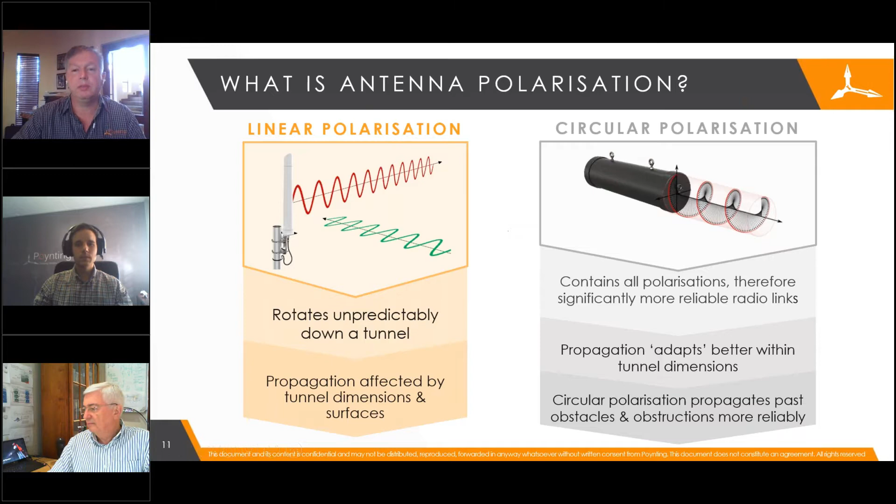And then also quite interesting, and I'll show that in a case study shortly, is that circular polarization tends to propagate past obstacles and obstructions. So I'll just quickly touch on that in the case studies where that has become quite evident and what the results of that are.

So just another slide on vertical and horizontal polarization. As you can see over here with the vertical polarization, you've all probably learned in science in high school that when you have a wave, also in a water situation, you drop two stones, you'll see that there's constructive and destructive waves. And as soon as a wave like this bounces off the top and the bottom surfaces of the tunnel, after the first reflection, you'll start receiving either a constructive or destructive wave.

What unfortunately happens is you could have an amplification of your signal, but you could also have a deterioration in your signal. What actually happens is an effect which is called fading. So the signal fades and becomes unpredictable. So you can either have a very strong signal or a very poor signal.

And most of you have probably, especially in the older days when normal FM and AM broadcasts on your car radio were a little bit more sparse, seen when you approach a traffic light that when you stop, all of a sudden your signal goes away. And then you just move forward maybe 1 meter, 2 meters, and suddenly your signal pops back again. And that is because of this phenomenon. And this is quite common in all different types of communication, but it becomes quite prevalent in tunnels, mining tunnels, automotive tunnels, and so on.

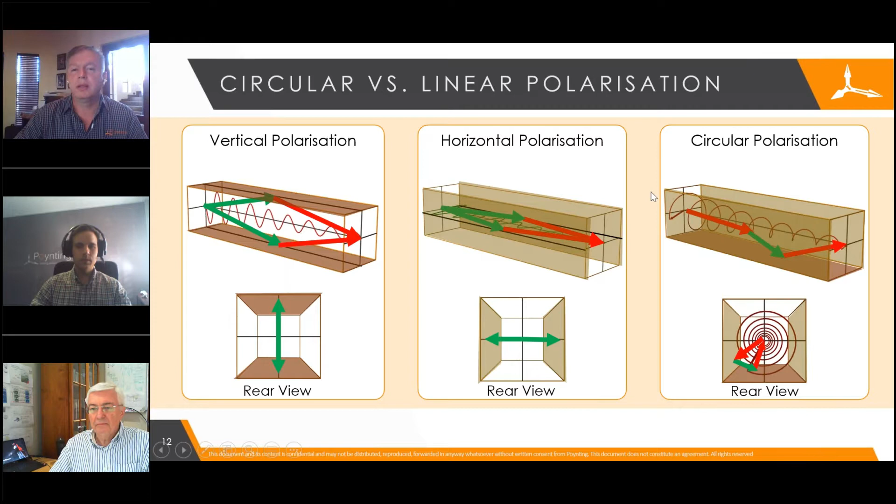So because you're transmitting a circle, imagine these, I don't know what you call these springs that you send down the steps, but if the spring went down the first step in one way, it goes down and it changes and gets a mirror effect. And that causes the signals not to fade that much as with linear polarization.

Next slide is just to show you that within circular polarization, you have both left and right polarization. So many circular polarized antennas are either the left or the right. So it's just something interesting to take care of when you select your antennas. But we'll get to that point also shortly.

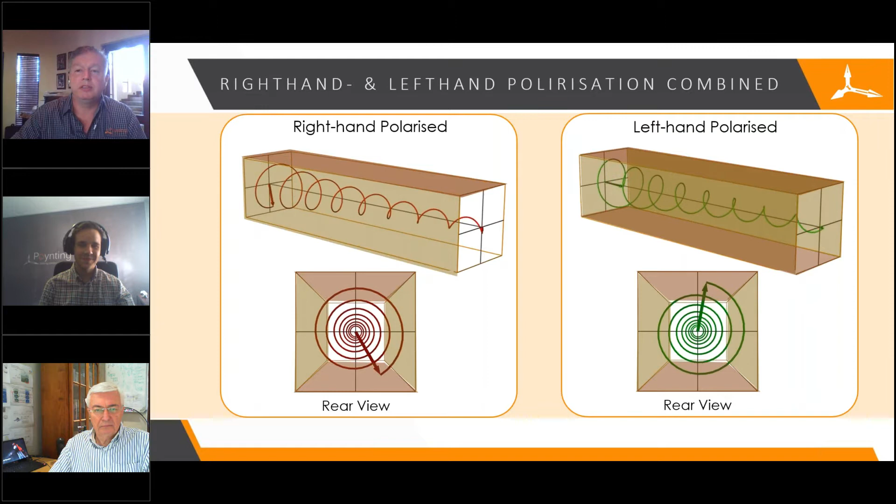You'll also see here that the way that the signal reflects off the different surfaces just becomes much more manageable. But the polarization does change every time it reflects off the floor. Characteristics over here, Ernst is just going to give us a little bit of an overview. A study that was done actually in the 1970s, and it is a reference case still today and still valid today, which is quite interesting.

Ernst? Yes, thank you, Stephen. So this is just to explain the characteristics of underground communication. And as you can see, the propagation of electromagnetic waves down tunnels has been studied for quite some time. And this IEEE article was published in June of 1978, and the title was Radio Communications in Tunnels.

Now, this study was done in Japan in a train tunnel, but the theory and the results still applied to mining and underground tunnels. Now, as you can see on the right, you have your graph, and this is an attenuation graph. So on your y-axis, you have your attenuation constant in dB per kilometer on a logarithmic scale, and then on the x-axis at the bottom, you have your frequency, which is also on a logarithmic scale.

So the study found that the lower your frequency, the more attenuation your propagating wave will experience. So for instance, for LoRa at approximately 900 megahertz, you'll experience 2 dBs per kilometer. But let's say you move all the way to 2.4 gigahertz, you get an attenuation of approximately 0.4 dBs per kilometer, which is significantly reduced. And if you move up all the way to 5.8 gigahertz in the Wi-Fi band, it's 0.1.

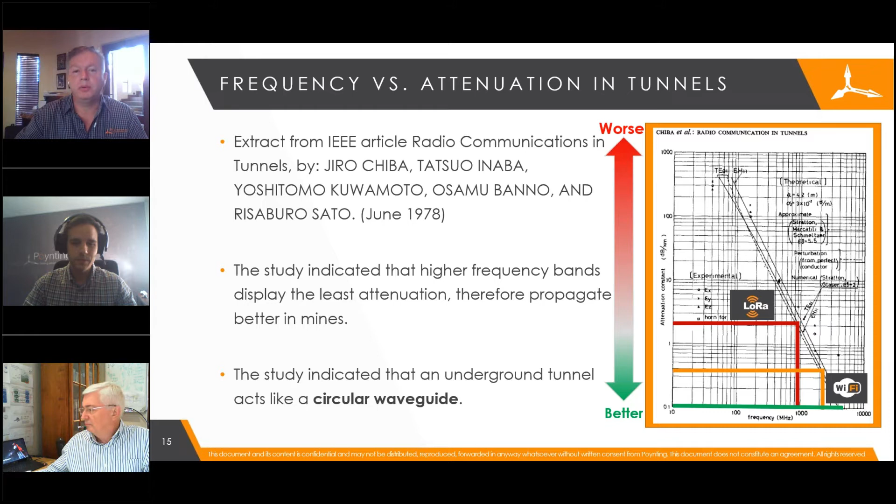Just something to mention there, Ernst, is that this was done in a tunnel with very smooth edges. And I think that leads us to the next slide, which gives us a little bit more information on that. Yeah, just to illustrate the theory of the article, we just have this representation of a tunnel. Now, as you can see, this is just an illustration from 900 megs all the way

to 7.2 gigahertz. Now, at 900 megs at LoRa, you can see the tunnel is quite rough, and the propagating signal would be attenuated due to the roughness of the walls, as it would also reflect quite rigorously from the underground walls. But if you move all the way to 5 gigahertz, you can see that the roughness of the walls significantly decreases and it's much smoother.

That is why, as it's smoother, the propagation of the waves will be much better and can travel much further, which is contrary to normal wave propagation outside. So in other words, we found that 5 gigahertz is a little bit more suited to smoother tunnel walls, whereas the lower frequencies are a little bit more suited to rougher tunnel walls.

And that's just because of the wavelength of the signal that is affected by the roughness or the smoothness. And the smoothness, as we said, acts more like a waveguide for a specific frequency band. And the roughness works a little bit better for lower frequency bands. So this is quite interesting when one selects your frequency band for the specific tunnel that you are using.

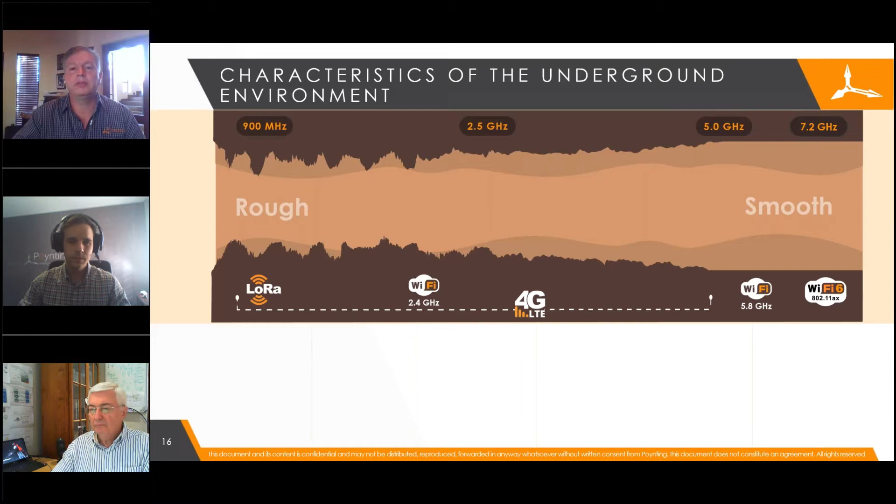However, we have actually seen quite different results, and we'll get to our case study soon just to show you what effects the different frequencies have on the different types of tunnels. That is correct. Thank you, Stephen.

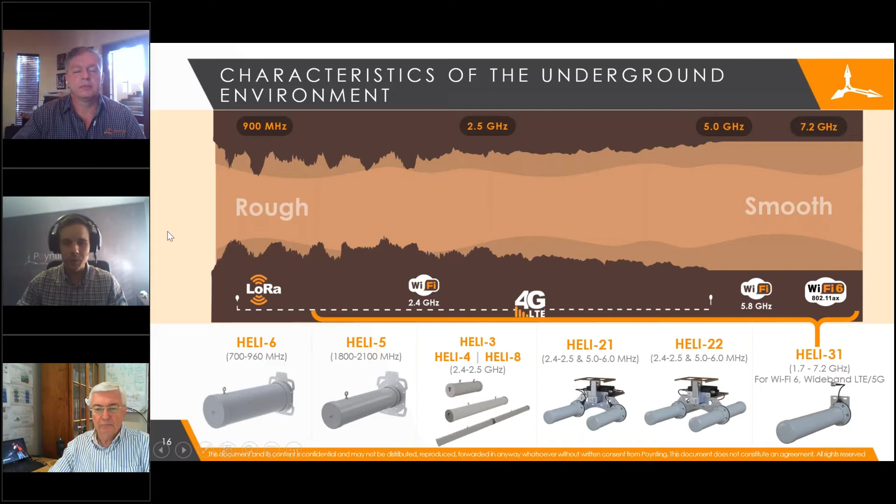Good. Thank you, Ernst. I'm not sure if I skipped a slide there.

No. So just a few implementation scenarios just to show you. We've used a generic router over here. This is our Heli-22, which we will get to in the overview of the antennas later, but just to show you how circular polarized antennas work, at least how to configure them. So the specific Heli-22 is quite a unique antenna. I haven't seen anything else in the market like this. We do have some competitors on some of our other ranges, but we haven't seen something that is dual band per antenna or multi-band.

Ernst mentioned that we have an antenna that goes from 1.7 gigs all the way to 7.2 gigs for Wi-Fi 6, that is 802.11ax, and also for LTE and 5G. But this specific antenna that we're showing over here, Heli-22, is based on the ISM frequency bands, which are used in Wi-Fi, that is 2.4 and 5 gigahertz. And when I say 5 gigahertz, I actually mean that it goes all the way from 5 to 6 gigahertz. That's just the band.

And just to show over here, because a lot of our customers are not sure how to connect them and how they are configured, the one antenna is set up to be left-hand circular polarized. If you remember the previous slides, I've shown left and right-hand circular polarization, but we'll give a little bit more information on that soon. This is actually an antenna assembly that we sell as the Heli-22, which physically has two bidirectional antennas. Each antenna radiates in both directions.

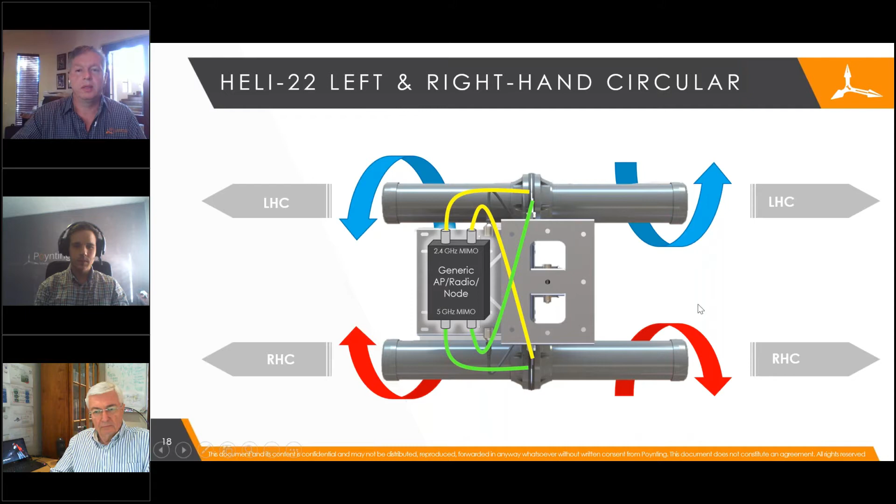Not to go through this one too much, but it's the same with our Heli-21 antenna, which is a directional antenna typically mounted at the beginning or end of the tunnel, or where you have a T-junction, also connected in the same way. Both antennas have both 2.4 and 5, and then you have the left and right hand polarized.

Just to mention quickly, this bracket that we have over here is just one of our brackets. It's a roof mount bracket, and we also have one that is roof bolt for mining, where they have these roof or ceiling bolts that mounts directly to that. It's got a small platform over here for generic routers, so quite a lot of routers, APs, radios, nodes can actually connect directly to this, and it just makes installation easier.

All that this needs is, if this is a mesh node, it just needs power, or if it's being sourced by an Ethernet connector, then it's just power over Ethernet. So that's all you have to take to this antenna, and you don't need all the other power supplies, or routers and APs mounted in a different place with long feeder cables. The shorter feeder cables also help quite a lot to reduce the attenuation, and improve the throughput and signal quality.

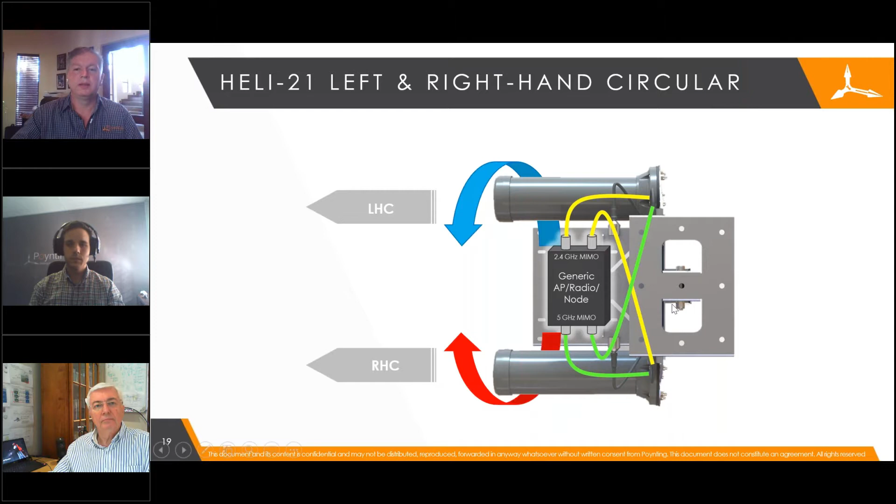Next slide over here, Pieter, you are just going to go over this one. Yes, so this is a case in point where we've seen deployment of access points underground.

Now, with access points, as you can see there, these are vertically polarized antennas. But what we did find was that these needed to be about 100 meters apart, just to get the signal propagation properly along the tunnel.

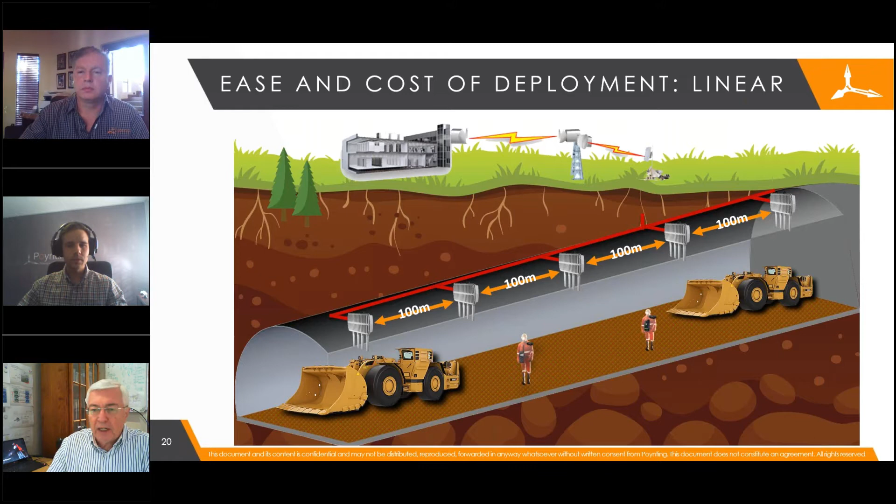So if you can go to the next slide, Stephen. Yeah, so now it's the case study, or the business case. Assuming that we are going to deploy these routers over 5 kilometers, you can see the calculations there, the router or radio, the antenna, and the installation, and that gets you roughly to around $230,000. I must say those are generic numbers, so you can plug in your own numbers to give you an indication of what this cost will be.

Okay, next slide, Stephen. Just to mention something quickly on this also is that we've also seen, okay, so it can be 150 meters. We've also seen 100 meters, 150 meters apart. But it seems like the deployments with these linear antennas are very limited, and it just means so many more access points. So I'll just quickly go to the next slide.

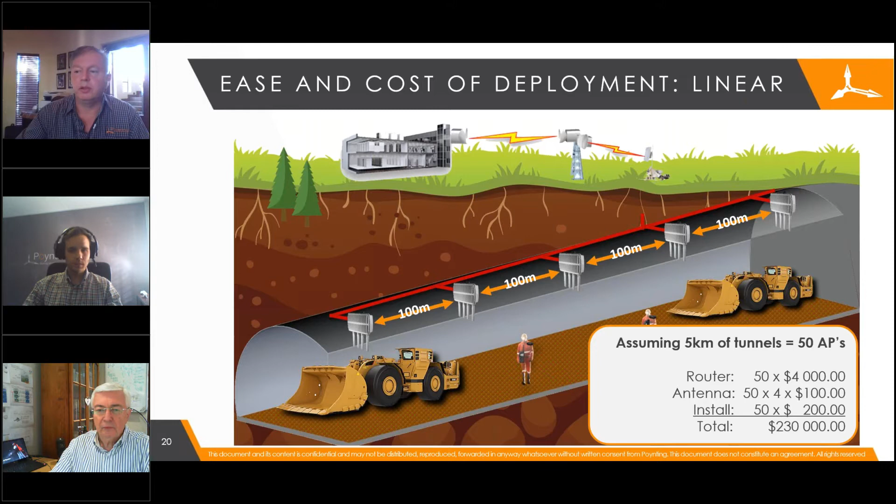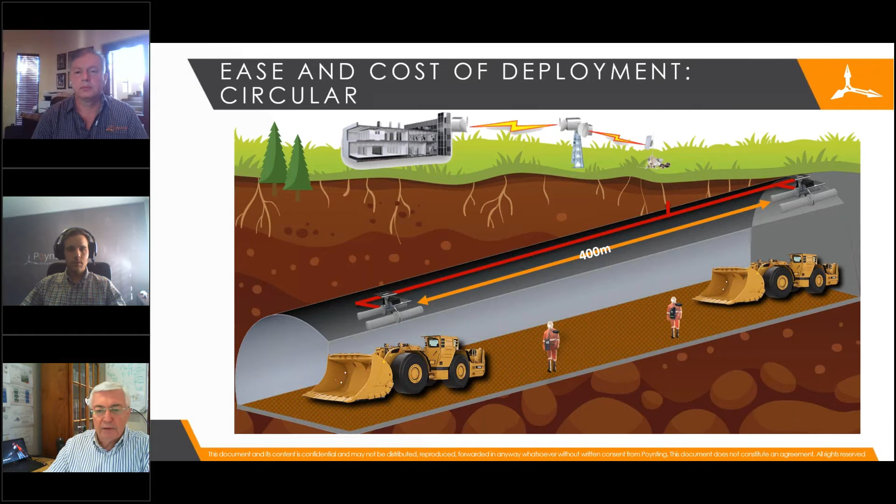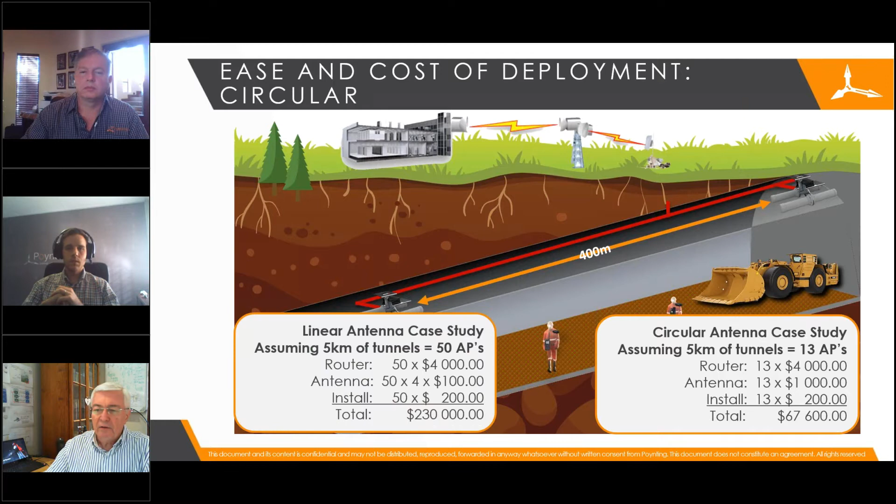So there you can see that to cover 5 kilometers, we will need 13 of these access points, these stations, so to speak, with the antenna costs. So we're looking there at around $67,600 thereabouts. If we compare that to the previous slide, you'll see that that is more than 3 times more to cover the same distance. So obviously with circular, you're getting better bang for your buck.

Just to mention that the 400 meters used here is a specific case that we've had. We've had much farther distances that we have achieved in the coverage. This is just a case study, but we have achieved distances of 500, 600, and beyond. And just to mention that these distances quoted are very specific to the tunnel - you could have wider tunnels, thinner tunnels, rougher or smoother surfaces, depending on what frequency band you are using.

So because customers always ask us what is that distance that we should mount these antennas apart, my first comment to them is that it's good that the integrator actually does some system tests, puts up some test antennas with the radios that you plan to deploy, and check how it performs, because every mine tunnel is different. But the values that we have used in both examples, I would say, is a little bit on the conservative side - but indicative of some kind of an average that we have experienced.

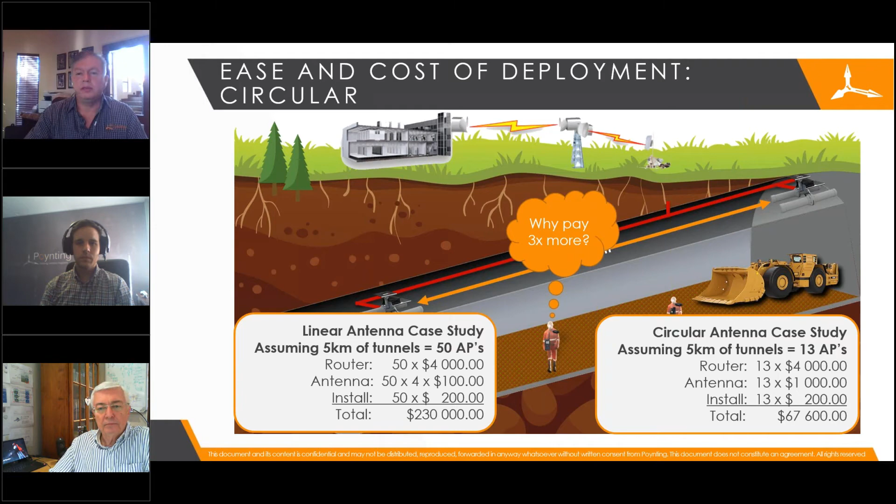Just something to add - we have found that even along doglegs, you would find that the signal propagates pretty well. But as he quite rightly said, it depends also, of course, very much on the type of tunnel, the type of surfaces, and the dimensions, ceiling versus width of the tunnel. In our case studies, you'll get some examples of what our customers have done, and it's quite interesting to just see what the performance is actually.

Okay, Ernst, if you can take this slide. Yes, thank you, Stephen. So this is just to put it into perspective - this is an example, a case study we did for a customer that wanted to deploy our HELI antennas within a train tunnel. Now, the cross-section of the tunnel was around about 5 meters, and we measured the receiver at 800 meters. This was done specifically with our own design simulation software.

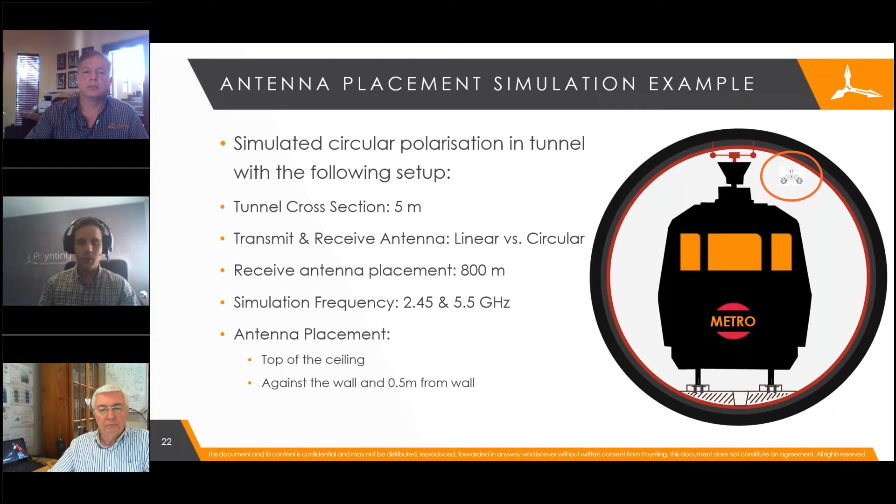We did a few rough calculations at 2.4 and 5.5 gigahertz, and we did two different calculations, measuring the antenna against the wall, exactly against the wall, and 0.5 meters from the wall. This is just to give the customer an idea of where the placement of the antenna should be and how that affects the performance of the antenna.

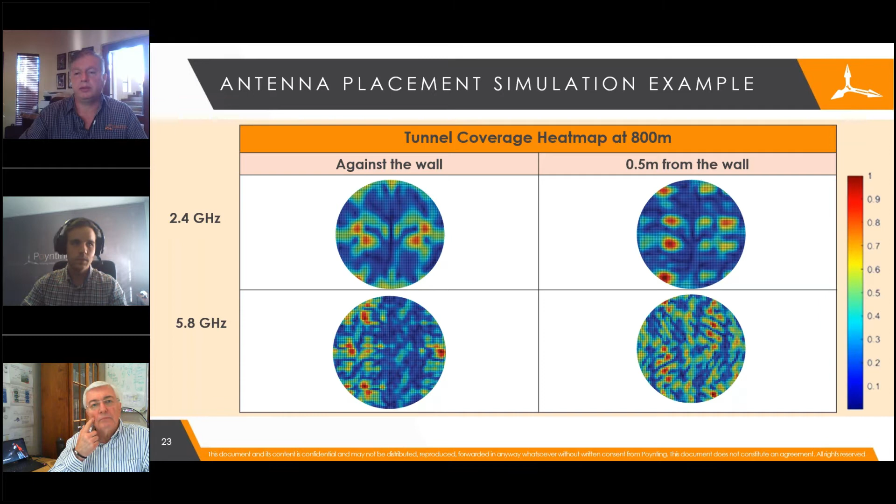So you'll see that the spacing between the antennas was designed to be 3 wavelengths, which we recommend as a minimum distance between antennas to enhance your diversity and MIMO within the tunnel.

And if you look at 5.8 at these distances, we're getting about 6-7 times the wavelength, which provides quite good diversity spacing. So that's just this example over here.

Looking at our recommendation of a minimum of 3 wavelengths, there's no right or wrong answer. If it's more than that, it's also good, and if it's less than that, that's all you have to install the antenna. It will affect your diversity and MIMO, depending on how far or how close you actually mount these antennas, so it's something to take into account when mounting. It's obviously better, as per this example, to space them even farther away.

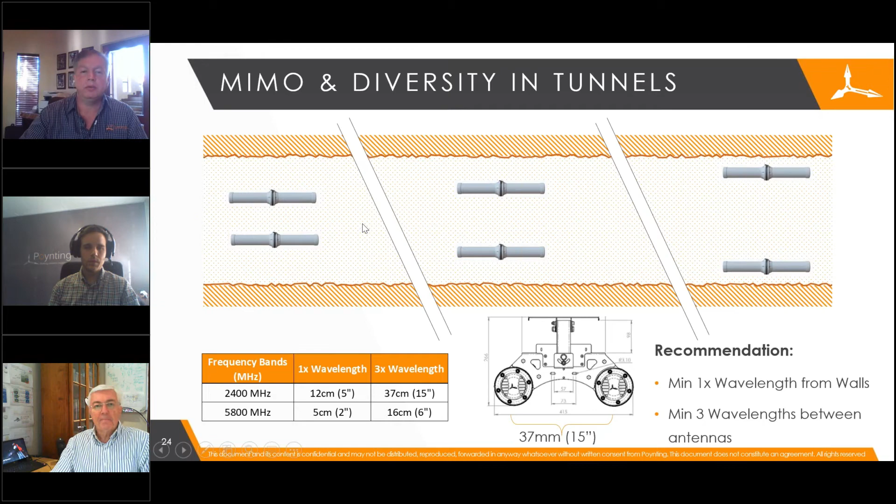It's just a minimum wavelength over here, again a rule of thumb and a recommendation. But with our antennas, if you mount them directly against the wall, you see the bracket is about 120 millimeters, which means you can mount this antenna directly to the wall, as long as the wall and metal parts are not touching this radome, it is perfectly fine. However, 1 wavelength minimum from the wall would be a more ideal situation. So somewhere between this scenario and that scenario is perfectly good for implementation of these antennas.

Good. Historically, when we didn't really have MIMO as a common feature on different radios and routers, you'd have, for example, a circular polarized antenna working from Heli to Heli. There it's quite important, if you have a right-hand circular polarized antenna, to have on the other end also a right-hand circular polarized antenna.

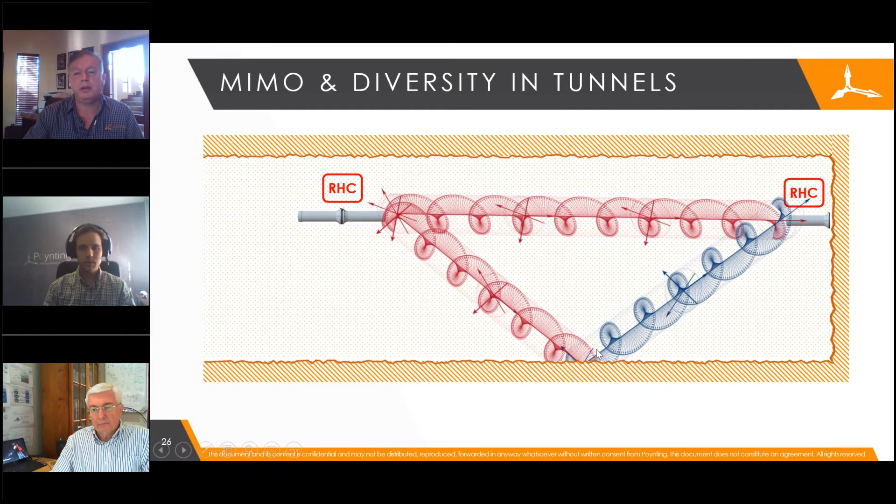However, I'm going to contradict myself now. When you have a reflection off the wall, as I mentioned, if you transmit right hand, that reflection becomes a mirror image, and you start getting left-hand circular polarized. Right hand is clockwise, so your signal rotates clockwise, and left hand rotates anti-clockwise. So although that will also be received by the receive antenna, because it is decorrelated, it will be at a lower receive level.

The same as taking a television antenna, as I mentioned, where the broadcasting corporation is transmitting vertical and you receive horizontal. You will still receive the signal because of reflections and other factors, but it will be at a lower level, and you'd also experience some level of fluctuation, fading, and so on.

In that scenario, later MIMO became available, and as you can see, you can have completely decorrelated signals.

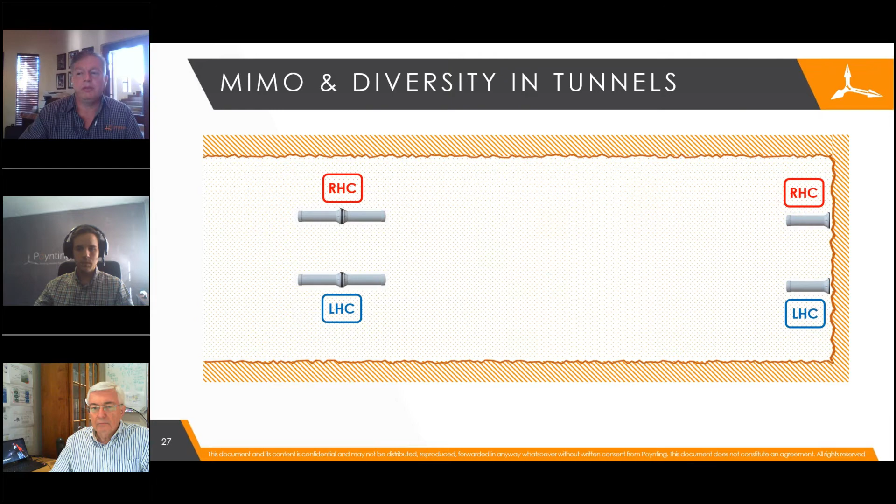But the nice thing about having left-hand and right-hand circular polarized antennas is when this reflects off the wall, you'll see that you will still benefit from the diversity antenna. So maybe your line of sight is to this antenna, or you don't have any line of sight, but its reflections would be completely in polarization with the left-hand circular polarized antenna, as in this example.

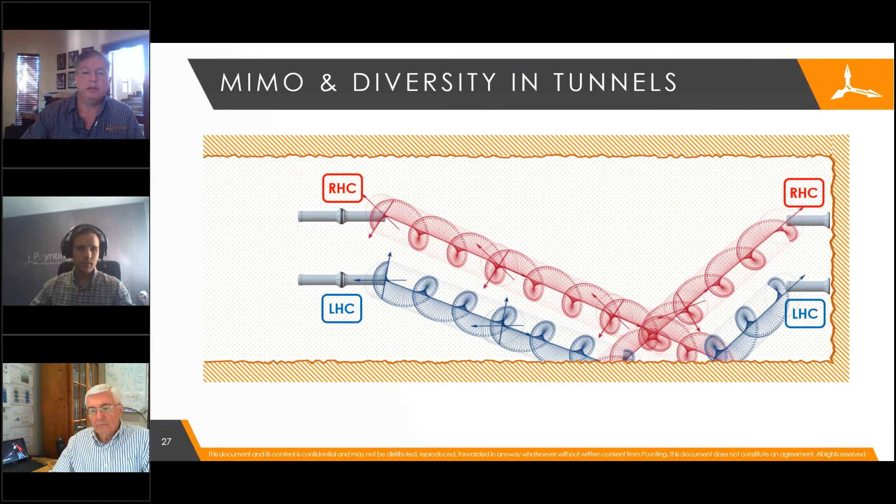So for us, we always recommend having both right and left circular polarized antennas in various tunnels - mine tunnels, automotive tunnels, and so on. Good.

So this is just a quick slide to show you that there are some building blocks when it comes to diversity enhancement. In a tunnel, in any type of industrial application, whether it's industrial IoT or LoRa or whatever the technology, the very first thing one can consider is circular polarization. It actually becomes the building block or foundation of the enhancement of diversity, reducing fading to strengthen your link.

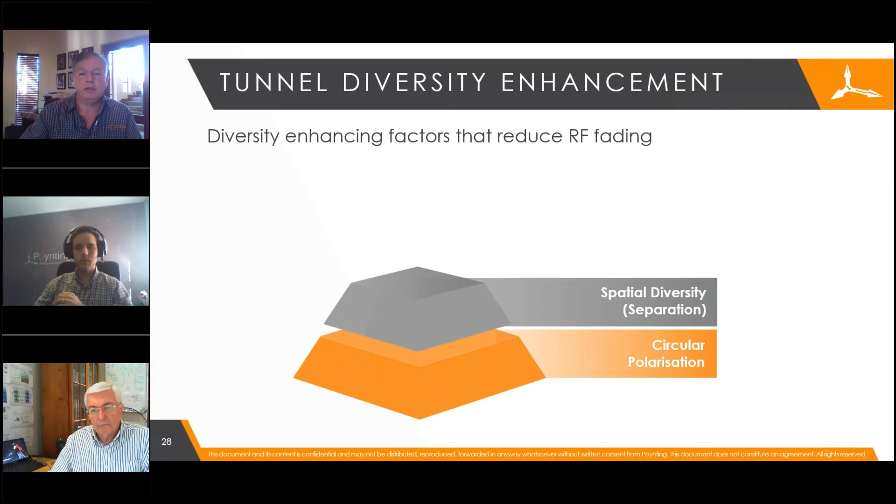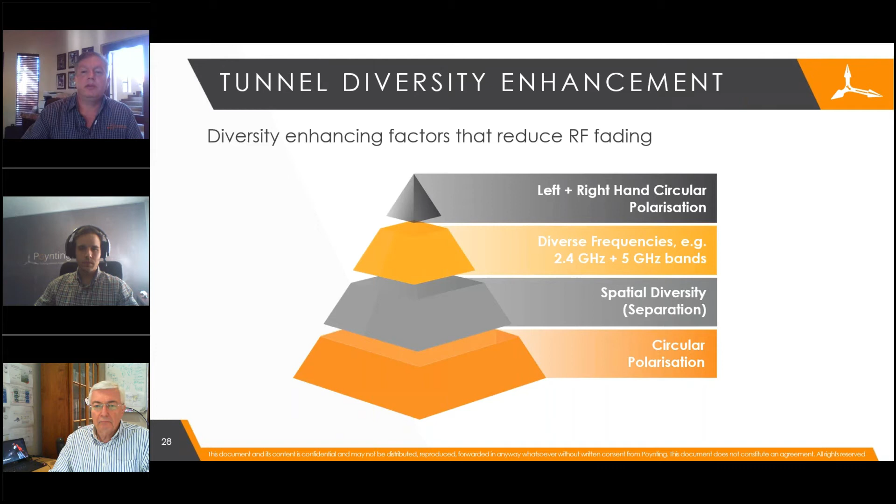The second part is spatial diversity, having two different antennas. Even if it's two right-hand circular polarized antennas, having two different antennas becomes the next step in the building blocks. Having diverse frequencies - I'll show you that shortly - having 2.4 and 5 gigs as an example, or if you use LTE to have 1.7 gigs plus 2.7 or whatever other frequency band together, actually makes quite a lot of sense because they behave differently in different tunnels. And then the apex is to have left and right circular polarization, as I mentioned on the previous slide.

Good, some case studies and examples. This specific example is on our website, on our case studies, if you want to go and refer to that with a little bit more text and so on.

This was a tunnel in South Africa that Peter and I attended personally. We were with a customer and an access point provider, actually a mesh provider, and some tests were performed in the tunnel. You'll see that we performed two tests here. I can't remember if the existing access points deployed were mounted at 100 meters or 150 meters apart, but nevertheless we performed a test in that same tunnel, and I think the customer told us the extent of the access point was about 150 meters, so they had to mount the access points actually 100 meters apart to make sure there's some overlap between the different access points. This access point provider was actually utilizing antenna beam steering technology, which sounded like quite a nice feature.

When we performed our tests, we did our first tests to a tablet and a phone. This specific test was performed with our Heli 22 - actually the predecessor of the Heli 22, which was a prototype antenna. At 155 meters, you can see that the 5 gigahertz signal, we were able to get minus 60 RSSI on the tests. The 2.4 was slightly weaker at minus 65 more or less, and this actually impressed the customer quite a lot.

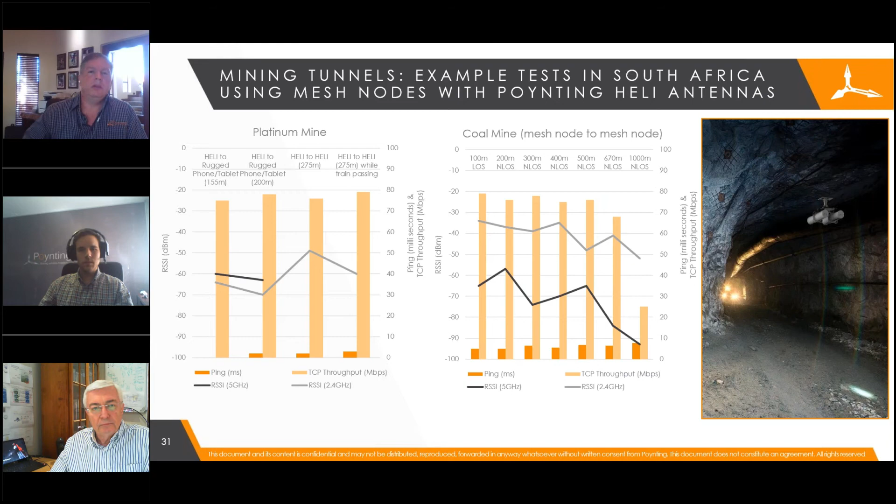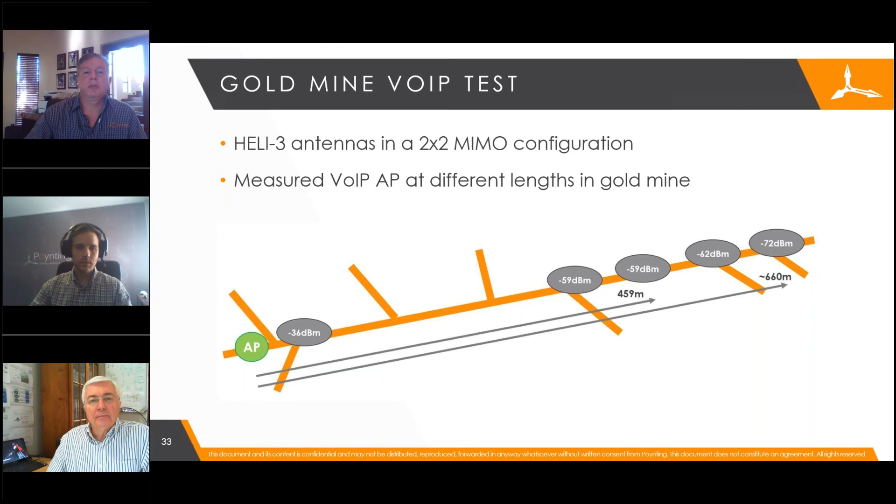So these are the results of the tests. You'll see here at 459 meters, some tests that he did, -59 dBm, and then right up to 660 meters, -72 dBm. So just to give you another example of a case study that's also on our website. This was that same customer using our Heli 3 antenna in a 2x2 MIMO configuration. Over here he was using voice over IP also in a mesh configuration.

Good. So these case studies are just to explain to you that it's not just talk. We actually have the results to show the performance of the antennas.

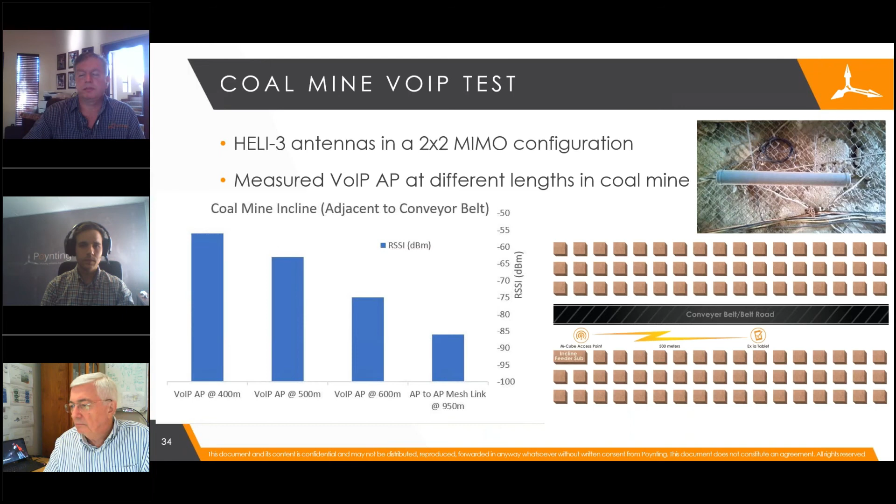Good. Ernst, this is where I hand over to you. Ilona, if you can make Stephen a presenter, that will be nice. Just quickly, just a moment. Okay, thank you, Stephen, and I think you can take a sip of water now. Oh, thank you.

So this is just to wrap everything up. I'm just going to give a quick overview of the wide range of antennas Poynting has to offer for underground communication and mines. So let's begin with our normal Heli series. Now, our CEO, Dr. Andre Fourie, designed the original Heli series 15 years ago, and our original Heli series has been sold for approximately 15 years, and they are still being used in the mines where they were deployed back then. It didn't get a lot of traction back then because the technology wasn't available for the antennas yet. But over the past few years, we've seen a significant increase in sales and interest in our Heli series.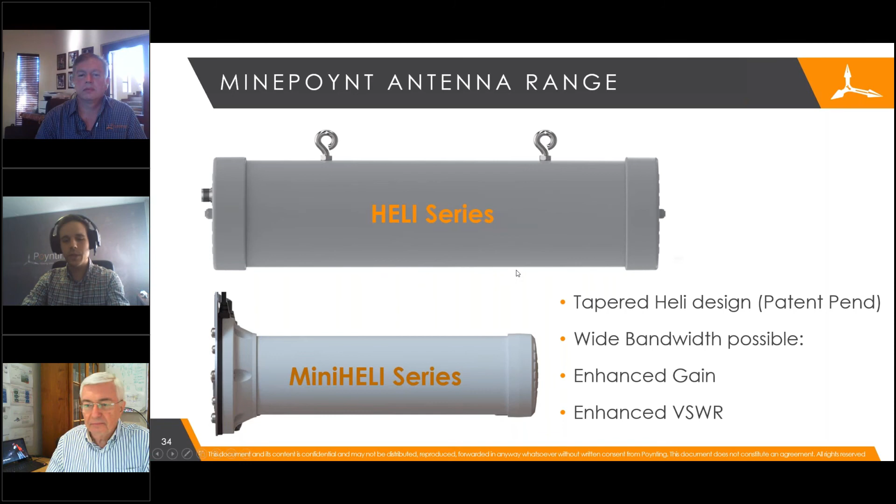And therefore, we revisited the design of our Heli antennas and redesigned it with a new tapered Heli design, which is now patent pending. Now, what's the benefit of this tapered design? This tapered design gives us a wide bandwidth as well as an improved gain. That is why it allows us to cover the entire 5 to 6 gigahertz band. And we also use the same design in our Heli 31, which operates from 1.7 all the way to 7.2 gigahertz. So this has drastically improved our performance with our Heli antennas, and we have seen a significant increase in sales with our mini Heli antenna range in deployments in mines.

If I can just make a comment over there: yes, our normal Heli series is actually still selling very high volumes. As you mentioned, these have been on the market for more than 15 years. And because they are so robust and so dependable, and because people have been using them for all those years, we also haven't really seen any returns on these antennas.

So I'm not sure, if something is going faulty, are they just replacing it? But we haven't seen any returns on these antennas, which is quite interesting as well. So it seems like they are quite robust. And we've also had situations of mines with minor flooding and so on, and the antennas are still working perfectly fine after that.

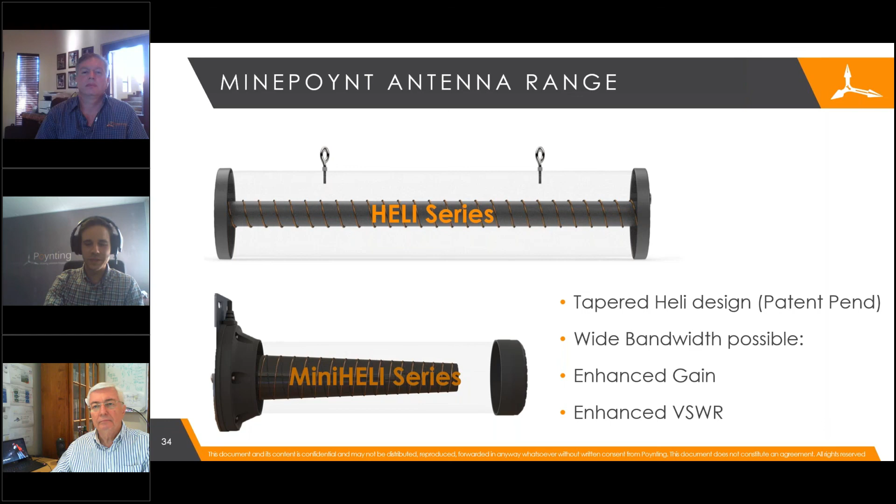No, thank you, Stephen. I appreciate the further explanation. So I just also want to give a quick rundown.

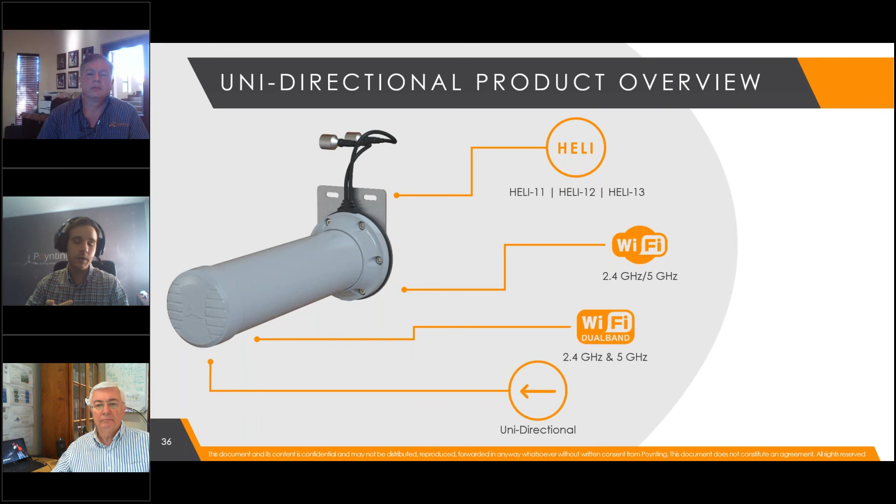This is our unidirectional mini HELI range. This is our HELI-11, 12, and 13, 2.4 and 5 gig dual band, and unidirectional. And then after we have our bidirectional mini HELI range, which is our HELI-17, 18, and 19. And they're also 2.4 and 5 to 6 gig Wi-Fi dual band.

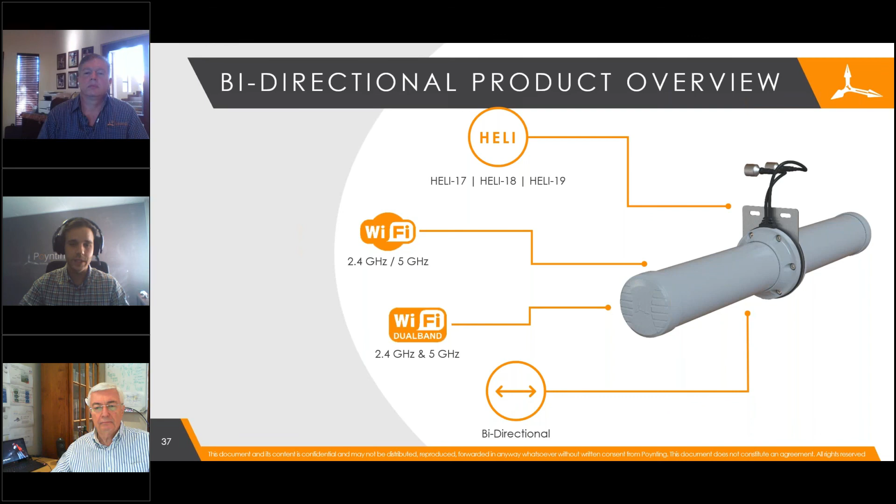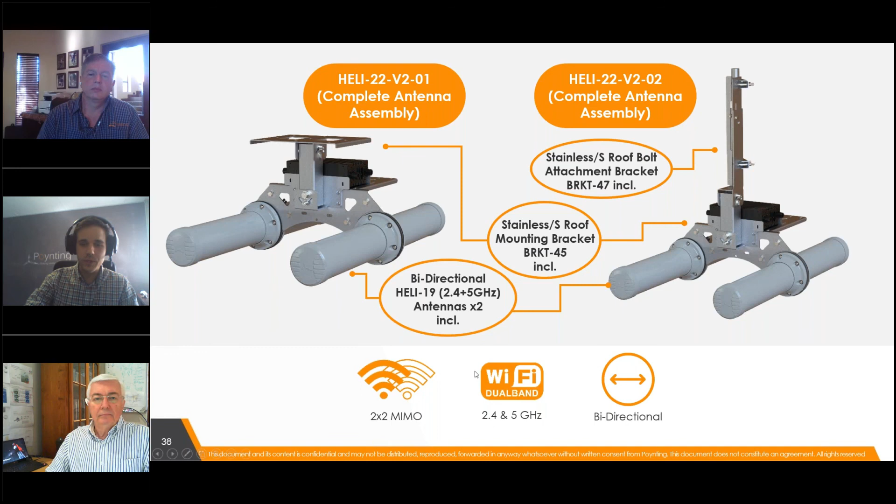And as Stephen mentioned before, here's our HELI-22. You have the normal roof brackets, roof mount, and then you have your roof bolt brackets, which can be used in the mining sector. And they are 2x2 MIMO, 2.4 and 5 gigahertz, and bidirectional.

And then lastly, we just have our flagship HELI-31, as mentioned before. Now this one operates from 1.7 all the way to 7.2 gigahertz as mentioned, and covers all the popular technologies, even Wi-Fi 6 and the 5G bands in the mines.

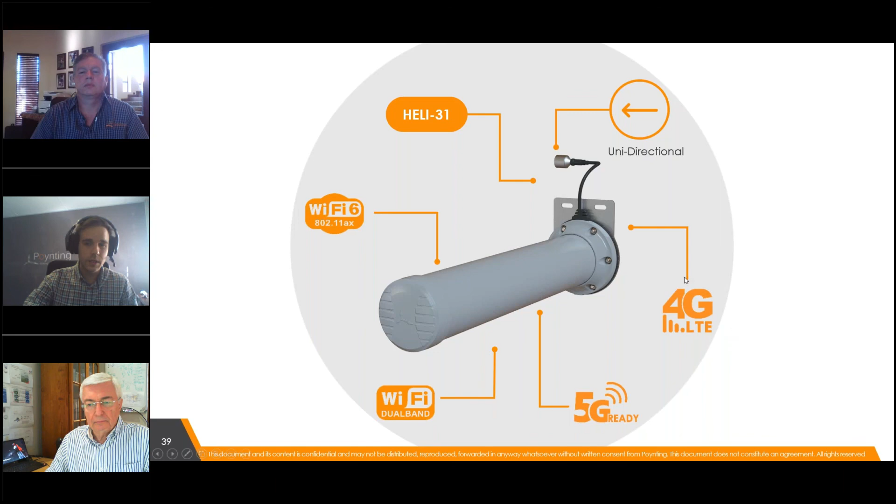Now this is just a quick cheat sheet for everyone if they want to know which antennas cover which bands. You can see here, only 2.4 is our HELI-11 and HELI-17. Our 5 to 6 gig antennas are HELI-12 and HELI-18, which are unidirectional and bidirectional. And then our dual band 2.4 and 5 to 6 gigahertz is our HELI-13 for unidirectional and HELI-19 for the bidirectional.

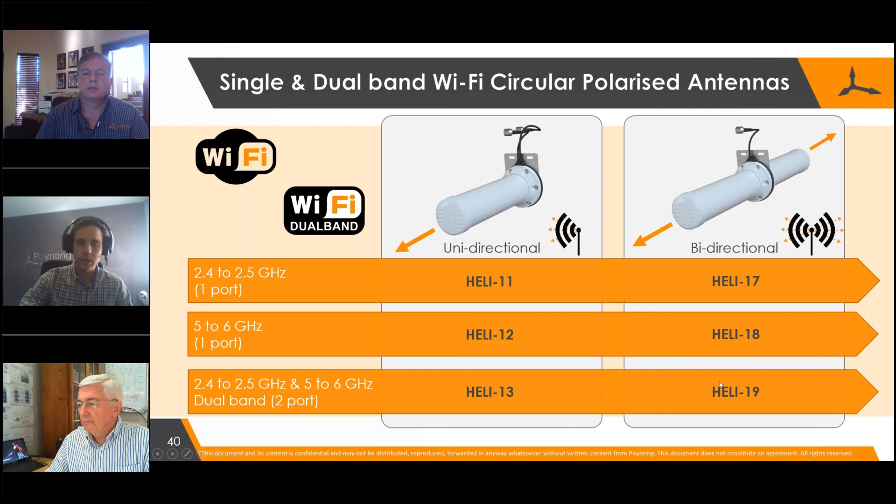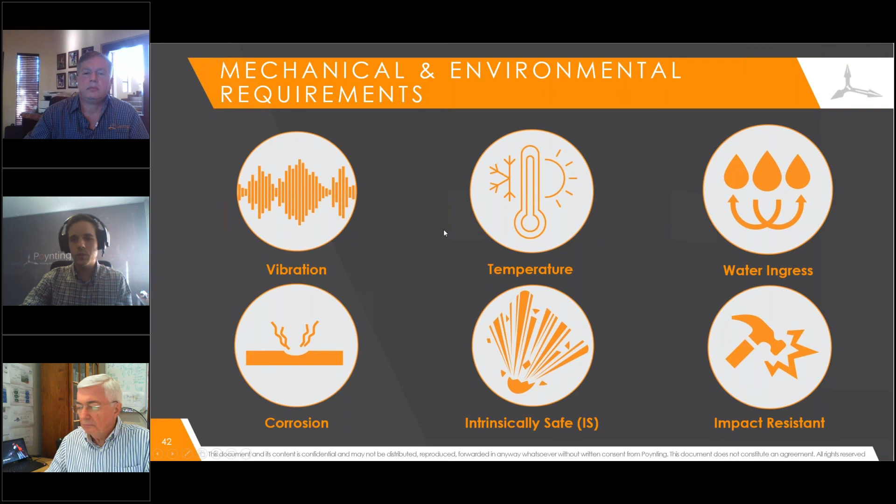And yes, all our antennas are tested and standardized against the harsh environment of the mining industry. As we all know, it's very rugged, and it requires rugged technologies and equipment to operate down in a mine. So we test our antennas against all the various aspects, such as water ingress, where we implement Gore filters for pressure control, as well as corrosion. That's why we use our 316 stainless steel brackets, and as Stephen mentioned, we do have intrinsically safe antennas, and all these are tested in-house and also certified by certified bodies.

Now, just to give a quick overview, we also have our MIMO 3 antenna, which is an automotive antenna, but it can also be used in mines. It's a 4x4 MIMO LTE as well as dual band Wi-Fi 2.4 and 5 gig. So this can be used in the underground mines to help with automotive use, and it's waterproof and dust-proof with an IP68 rating.

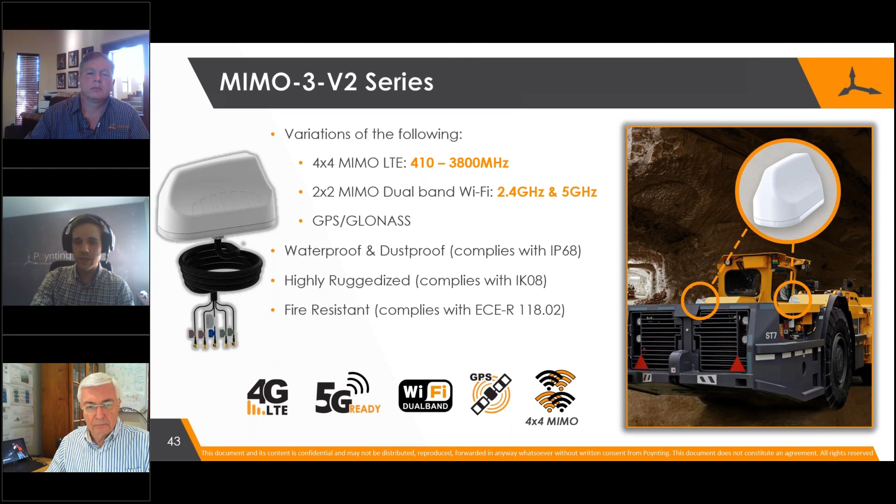Now, if the MIMO 3 is a bit too large for you, we also have our puck range, which is quite a large range, and it offers LTE and dual band Wi-Fi, and you can have a look at our product range on our website to see the various options that are available. And both of these antennas are foam filled and IP68, so they can be mounted upside down, and you don't have to worry about any water ingress or impact damage.